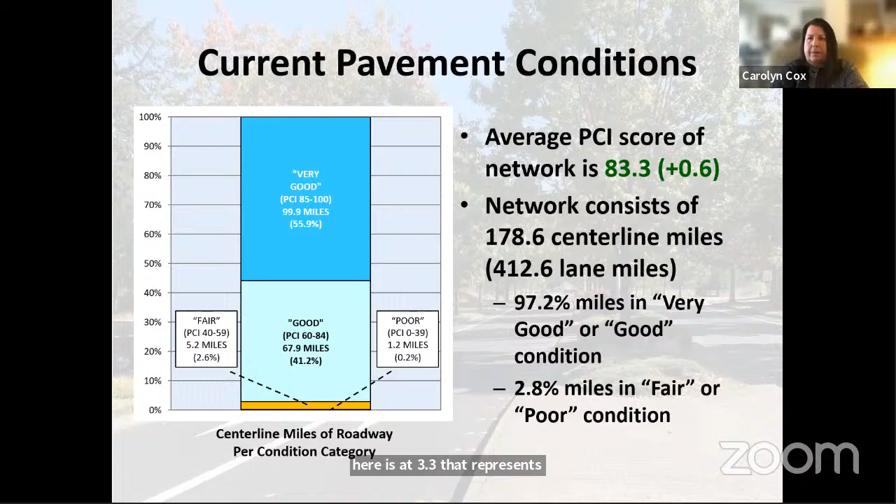Leading off, we'll go with our current pavement conditions, and our average PCI score for the network this year is 83.3. That represents a 0.6 gain. PCI stands for Pavement Condition Index.

It's essentially a score given to each street from 0 to 100. It's a proactive rating technique versus a method such as IRI, which is more of a reactive technique where the distresses show up and then they run the machine over it and it does an inches per mile type of reading. Versus this, where I go out and rate every single street every year and monitor cracking, alligator cracking, patching, rutting, weathering, block cracking for the street, and then punch it into an algorithm that spits out a score between 0 and 100 for each road.

And not all roads are created equal because it is an area-based measurement. So if a road section had, say, 100,000 square feet versus a road of 10,000 square feet, the one that's 100,000 square feet would have 10 times the impact on the PCI.

Our network consists of 178.6 centerline miles, which is a gain of 10.3 from last year. So we saw a significant gain in network mileage, and that is 412.6 lane miles of roadway.

Over on the chart, shows a breakdown of the conditions of the roadways in our network. Very good and good represent 97.2% of all streets in the city, which is up 1% from last year. And then that means the 2.8% fair and poor condition are down 1.8 from last year.

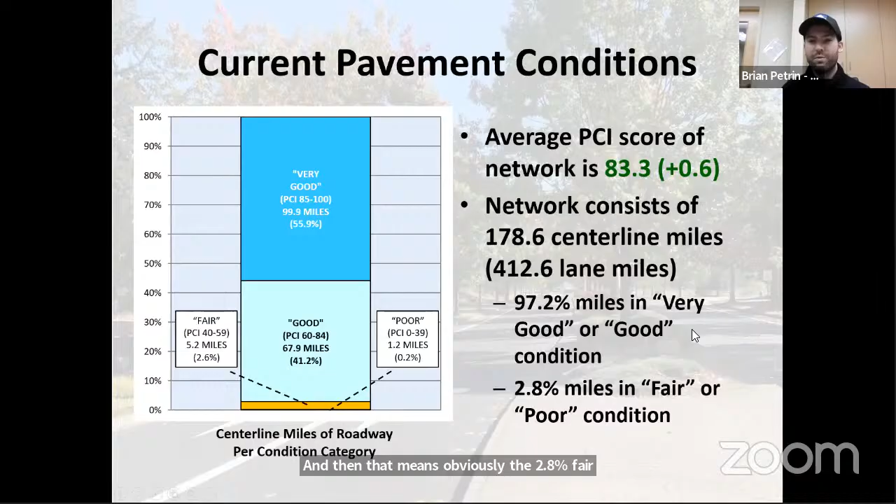This graph shows a 10-year running trend of PCIs dating all the way back to 2012. Shows the council the yearly running trend of our PCI, and effectively we've been hovering around 83 for the past 10 years.

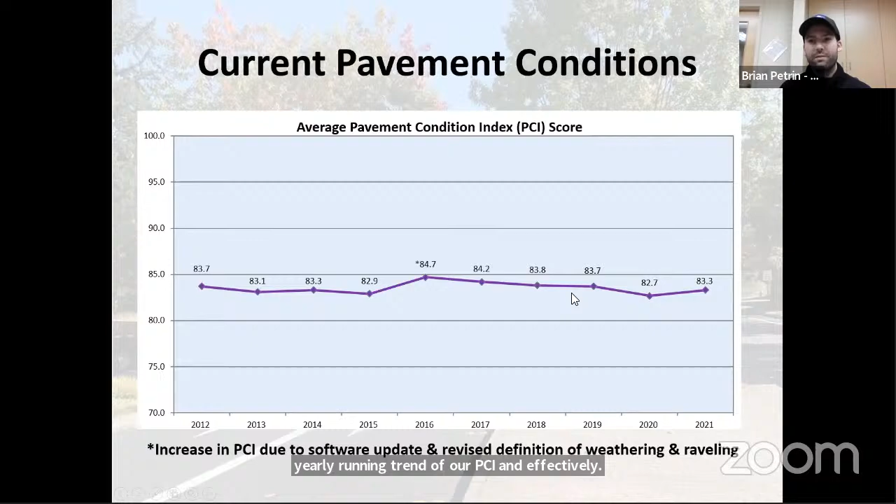Here's a network PCI map, an all-in-one map showing the condition of every road in the city. It's located after page 33 in the report if you'd like to see a bigger version of it. Actually, I might be able to zoom in here. There we go. And then you can see the dark blues represent roads in very good condition, light blue, good condition, yellows, fair, and red are poor. And with our network being an 83.3, there's a significant amount of blue and dark blue.

That map also is a good reference for citizens who think parts of Lacey are parts of Lacey and they're not, they're UGMA or county. Yep, absolutely, I like the map a lot.

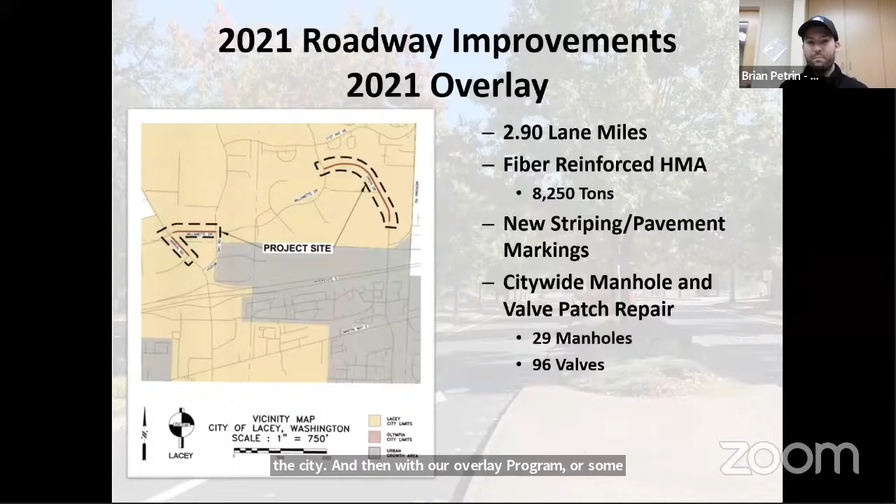And the striping was fading, and all your symbology was fading as well. In the after photo, we added the double yellow center line, refreshed the striping, and you can just see the condition difference between the old and the new.

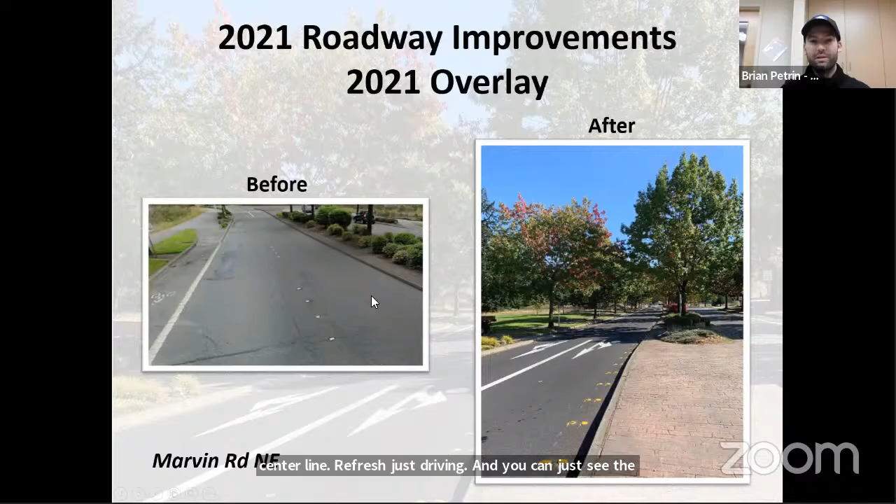Willamette was more of the same, except that portion of Willamette was in worse shape than Marvin. It had a significant amount of mastic, a lot of crack seal, a lot of cracks that weren't even covered by crack seal. There was almost more tar out there than road. So this really needed to go with this project.

I have a question. Crack seal, what is that? What is that material, what is that compound? Is it standard? Yeah, it's kind of like an engineered tar, where it's meant to be sticky but not.

So effectively, you put it in there and it actually expands and contracts with the weather. When it's hot out, it'll expand, and when it's cold out, it'll contract. So a lot of times you'll see them out there slathering it on nice and thick, just so when it contracts, it still covers what it's supposed to cover.

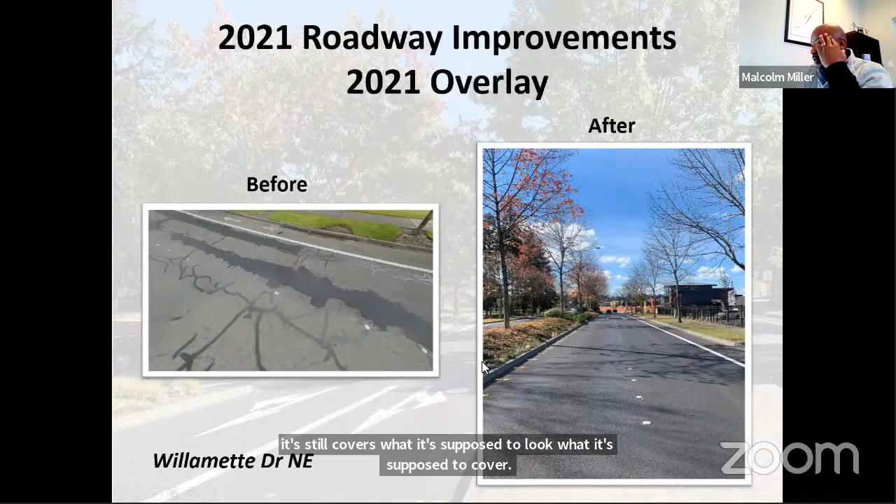I only ask this because I'm concerned about motorcycles. I know that stuff gets a little slick when it's wet, which is 9 months out of the year here. I guess, I don't know, I was going to say, is there any way we can make it so it's not so slippery when it's wet? On Marvin Road, when you go by that school heading out towards Mullen Road, there's a lot of this stuff on that part of the road, and when it's wet it's a little slippery, and I get concerned because there's a lot of kids. Anyway, it was just a thought.

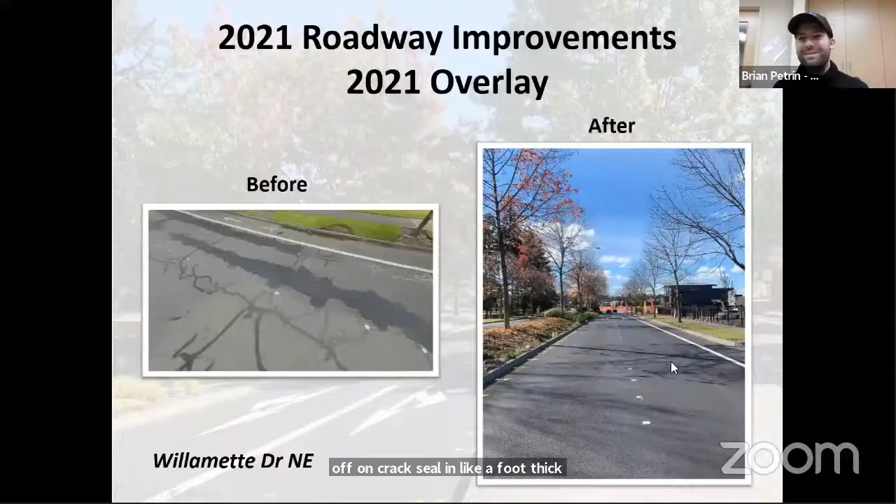Yeah, absolutely. When you see large patches of mastic like this, it's actually meant to be slightly coarse, so it does have slide friction resistance, but it's not advised to put it in turning areas such as roundabouts. You won't see us crack seal a roundabout or put mastic in a roundabout, to dodge that effect with a motorcyclist, and cars even can slip as well, but they have 2 more points of contact so it's a little tougher. I do realize you're technically not supposed to glop on crack seal in like a foot thickness, it's not the ideal use case for it. It's just meant to be a spot sealing of the crack, and if a crack gets to a certain point, then technically crack seal isn't the right approach for it anyway.

Gotcha. I was just wondering because I know that I've watched people slip, I've slipped a little bit, and I'm out there by that school and I see a lot of this, and I'm like, I didn't know what the composition of it was, so I'm just thinking to myself, is there, can we?

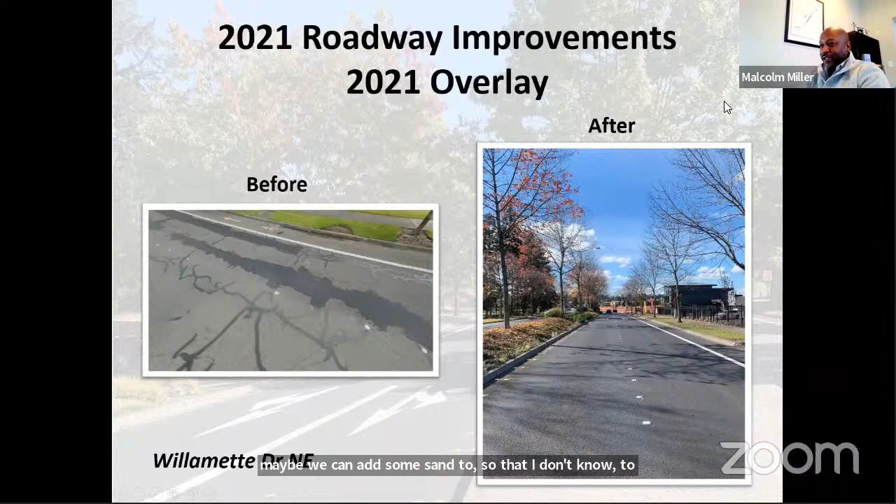I don't know what to think. In my mind, maybe we can add some sand to it or something to make it stickier, because it was right next to a school, and I was thinking if somebody were to lose control.

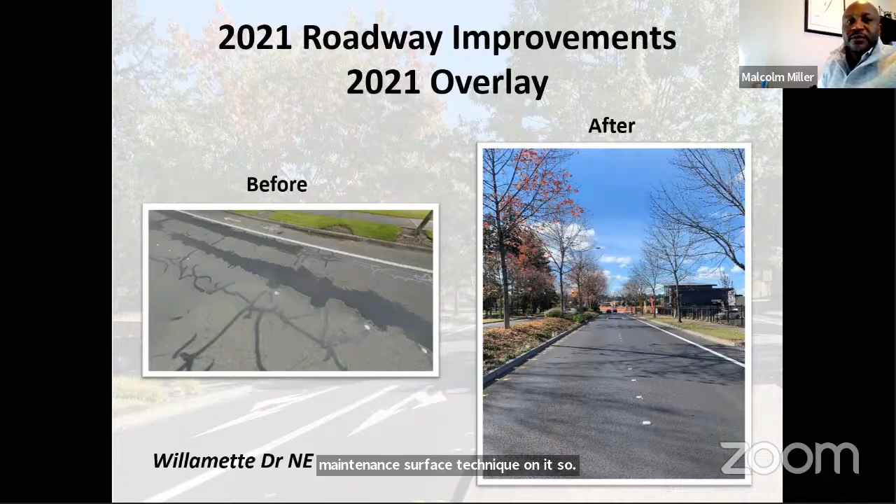I guess the short answer is it's designed not to be fully slippery. It's meant to have some slight friction resistance to it, but obviously not the same coarseness as an HMA mat. You'll only get that with a wheel path dig out, putting down new asphalt, or a preventative maintenance surface technique. Roger that, continue on, I just had that question.

Continuing, we did Orion as well. Here's some before and after pictures. You can tell this had a large amount of wheel path cracking and wheel path alligatoring. A lot of the outside lane had bottom-up cracking and was failing. Just looking at the color difference, you can tell there was a lot of moisture intrusion and oxidation of the surface, so we were potentially getting aggregate loss in certain spots on that road.

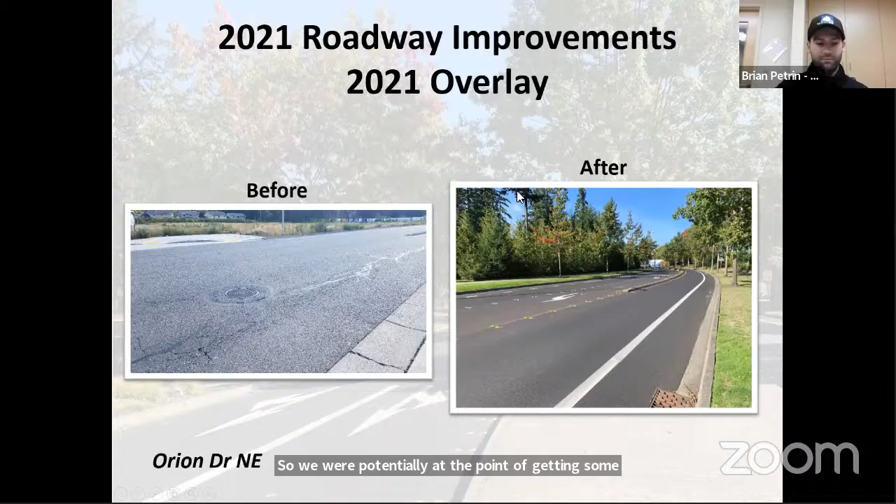Next project in our 2021 improvements was the Carpenter overlay. It was 3.7 lane miles, 2.39 in the city, 1.31 in the county. We also did a utility project in the area that went into the county.

Hey Brian, what's the rating of that? I drive that all the time and it looked bad. Which part, the south part? Probably closer to the S curve, up by the bus barn and where the overhead door is. The bus barn would be further north. That's the other curve. Oh, further south then. Yep, I got it, right by the fairgrounds.

The condition of the southern section before we redid it was low to mid 30s, and then the northern section by the school in Long Lake Park, I believe that was 70s.

Do you know offhand how that improved our overall rating? Because 30s are pretty bad, it's like a complete fail at that point. Absolutely, when we redo a road it goes up to 100, unless there's some construction error it should be a perfectly new street. So those 30s turned into 100s.

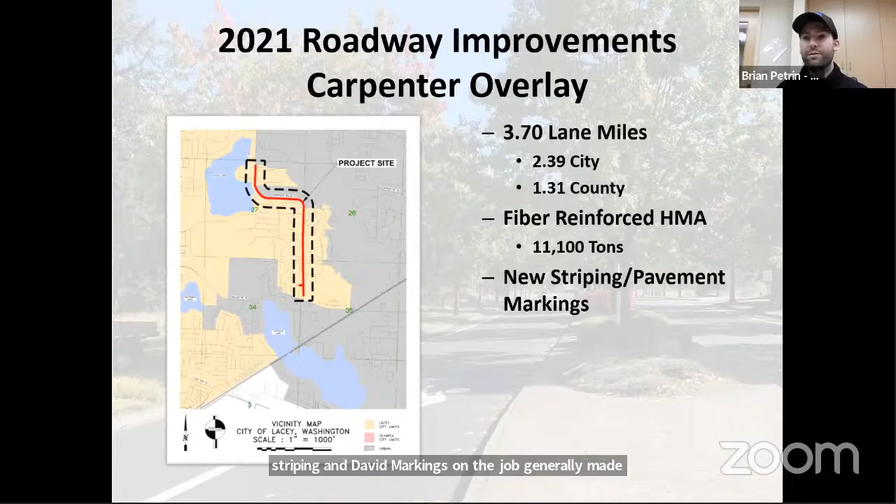Essentially, this project was the same as the 2021 overlay, where we put down 6 inches of fiber reinforced mat, came out to 11,100 tons, refreshed the striping and pavement markings on the job, generally made it a lot safer and fairer to use. Going into the pictures here, Carpenter was in much worse condition than Orion and Willamette, where you can see we were starting to get pavement loss and the outer lane was sloughing off into the ditch in spots - a lot of mastic, road heavily oxidized. You can tell water was intruding into the base and making it soft in spots. We were starting to slump and get a little bit of wheel path rutting.

And then just the comparison between the before and after - I mean, it's night and day on that road. Yeah, the improvements are really awesome. And you know, there's a lot of residential that's pretty close to that road, so I'm sure they're very happy that it's been redone.

I noticed that on the side where the school is at, and if you start heading north from there, there's a lot of shoulder, and then it kind of tapers down once you get towards fairgrounds. Is there some plan to widen that? It's in the TIP, but that's also a very large right-of-way take and a very expensive project that we probably wouldn't be able to fund through our funding streams. That'd be something more for Roger Schessel and Martin Hoppy.

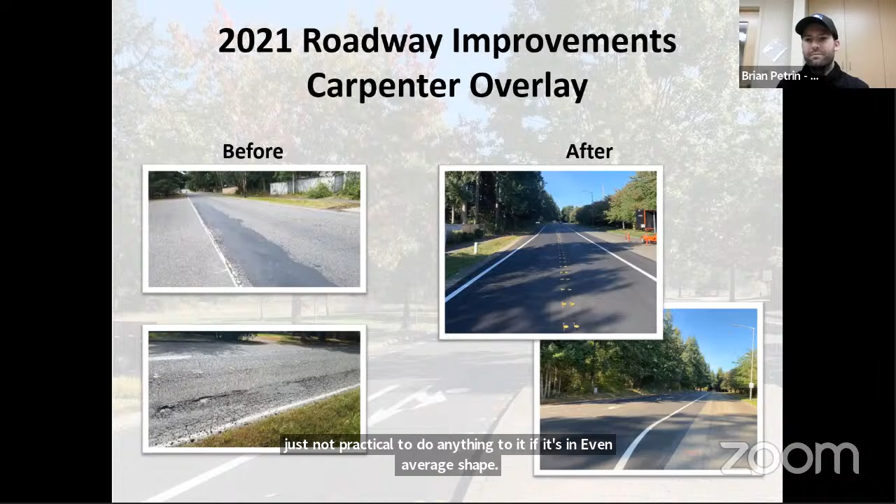And the final project that we did for 2021 was our slurry seal. We did a type 2 slurry. There's 3 types of slurry. Type 1 is essentially low traffic, it wears off pretty quickly under loading, used for parking lots. Type 2 is the middle ground.

And then type 3 is a really thick coat of slurry, which has a lot of noise to it, almost sounds like you're living next to a freeway. So it's frowned upon. It's usually used around curves and on heavily traveled streets, which this didn't apply to because we were doing residential. So type 2 was in the right zone for this project.

Hey Brian, can you overlay on a slurry seal, or does it have to be removed? You would typically grind before you overlaid. So essentially, if you put down a slurry seal, you'd be grinding it off to overlay anyway. And on residential streets, if you're grinding off the top, odds are you're grinding it off because it's cracked all the way through and you're replacing the whole street.

But there is a technique called the thin lay, where they do a thin grind, and I believe it's typically like a 5/8 inch mat over residential streets, which is kind of a newer technique. We don't personally use it, but I have looked into it.

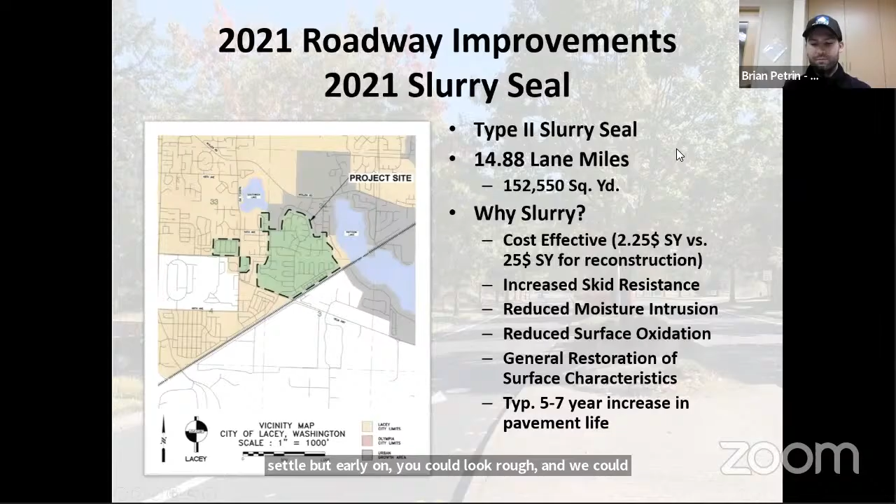Plus it goes down. Are we continuing into 2022 with slurry seal? Is there more to be done coming soon? Yes, we have plans to make this a recurring program.

Here's an overview of our 2021 work. We spent about $3.5 million in project cost, did about 21.5 lane miles of roadway, put down just over 19,000 tons of fiber reinforced mat, and then put down just over 150,000 square yards of type 2 slurry.

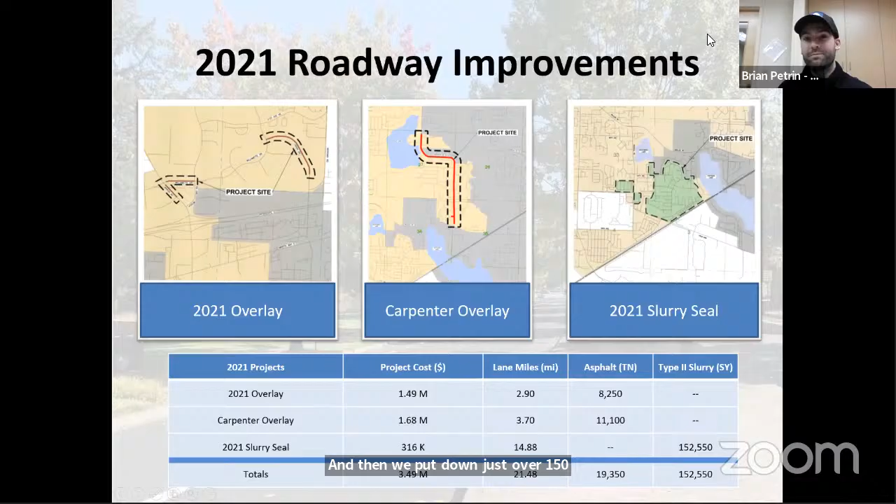This is a 3-year history of what we've done in the past. This will show the general lane mileage and square footage of road we've done, along with the asphalt cost. A big thing to take away here is the continued downward trend of asphalt, which we can't assume will happen every year. So what I do in our budget scenarios is take recent asphalt costs and add a safety factor to it, running our decision tree that way, trying to be more conservative because I'd rather be on the safe side of putting a higher cost in our plan work than a lower cost.

Especially with material shortages these days too. I keep following asphalt oil prices, which generally trend with the cost of asphalt itself, and those are back on the rise to about 2019 values now. So it's not to say the cost is going to go up to $111 a ton again, but it'll likely be higher than the $85 a ton we got this year.

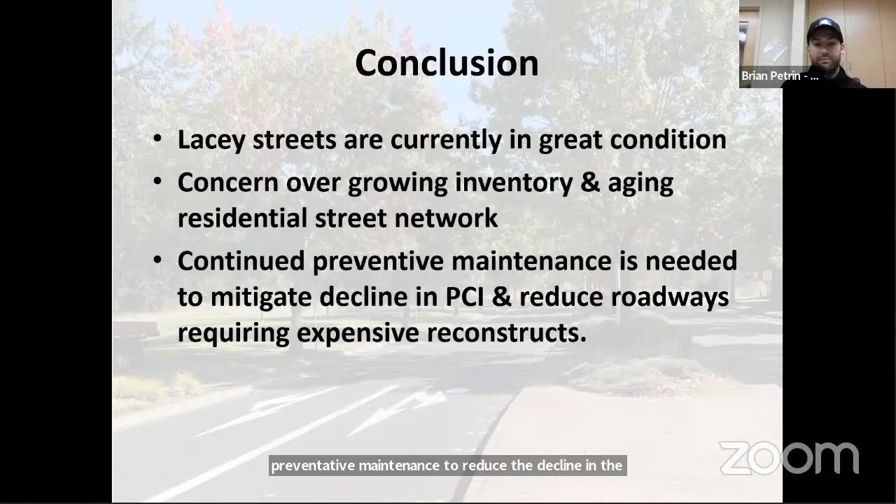That would conclude my presentation. If we have time for any questions, feel free to ask. Otherwise, my contact information is on there. You can call my desk phone, my cell phone, or send me an email if you need clarification on anything, and I will gladly try to respond.

Great job, bro, that's awesome Brian. Thank you for your presentation. I know we're running short on time. There were a couple of questions I wanted to ask about future projects like the college extension and 22nd and college as well. But I'll just have to table those questions for another meeting or reach out to you directly. It was just kind of like right-of-way and stuff like that.

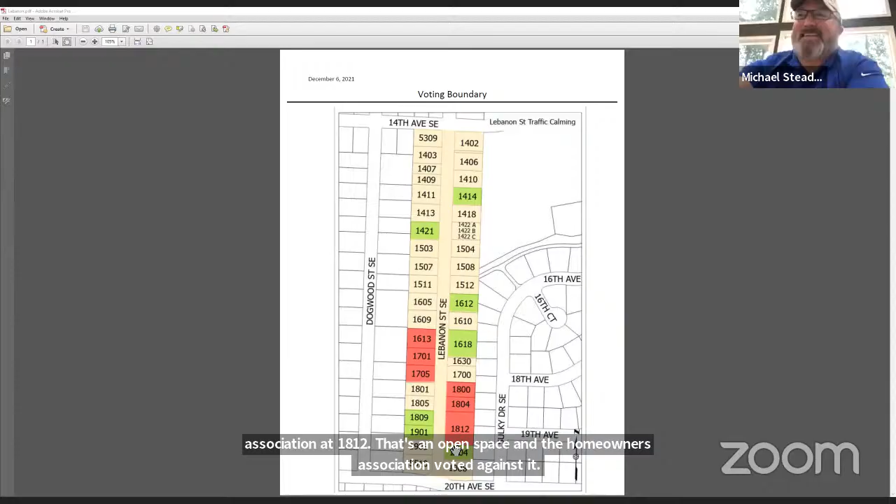How much time do we have remaining for the rest of these people to get their vote in? I've been kind of waiting patiently, haven't got anything in over a week. Okay.

What we were thinking is maybe after New Year's, send out a reminder email for the people that haven't voted. And for the non-owner occupied units, we're just sending them directly to whatever it says on the county records for where they actually like to have their mail go. Right, all right.

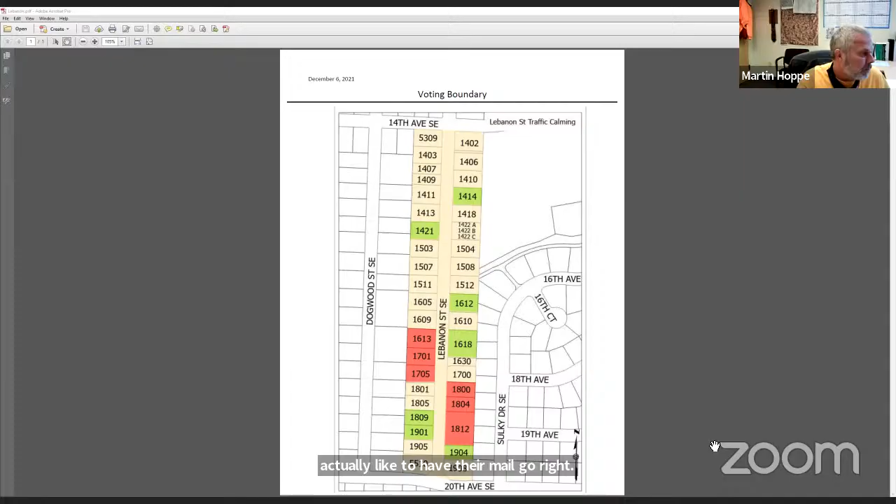You know Martin, one of the friends of mine and their daughter went to school with our kids, Rick Vermill, and he was one of the active residents in approaching the city with this, and he hasn't even voted at 1503. It makes me question, the way we've left it, if it's just good enough and not as big a concern anymore.

I'm not sure. I had about 3 people call me concerning the votes, and all of them voted eventually.

So Martin, is it possible that we can - I really want the people to weigh in, and even if that means sending them another letter saying, hey, to the people who haven't voted or haven't responded, maybe your life is busy and you missed our communication, but we really need you to weigh in on this issue. We don't want to make a decision without you if at all possible. I just want to make sure that they are getting reached, touched somehow, at least, even if they just acknowledge...

Yeah, I saw your letter, no thank you, I don't want to talk to you, whatever, I don't care - just need some acknowledgement from these people so we can do our job. Sure, and we could send out another letter. That's what I was suggesting. Maybe wait till early next year, I'll put a letter out and try again.